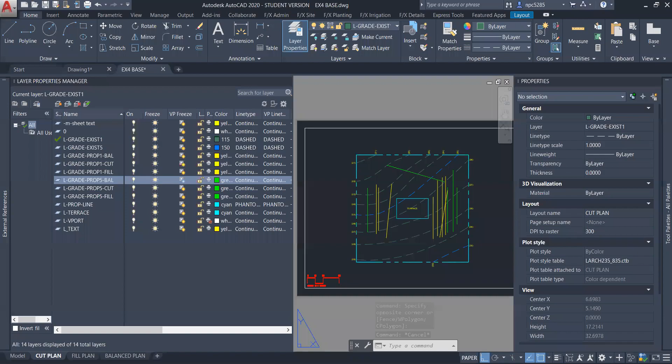Okay, so I am starting with EX4. I'm going to go through how you can organize your layers to make sure all of your line work is in one file, not separate drawings, and you should not be drawing in paper space or anything like that. The first thing I did to prepare for this assignment was go into the layer properties box. You can do that by typing 'layer' in the command bar, or by pushing the button up here.

I made a layer for each of the potential line work you're going to have. So when you do cut, you'll have your major and minor contours for that. When you have fill, you'll have major and minor for that as well, and balanced, so on. Total, you'd have 6 layers just for your contours for this assignment. I'll show you how to organize those, as well as how to turn them on and off for when you export.

So you've been provided the plan. I made these 6 layers that I just explained: L grade, and then proposed, and your minor and major - your firsts, your single, and your fifths - for balance, cut, and fill for all of those, and assigned their correct colors and everything that I thought was best.

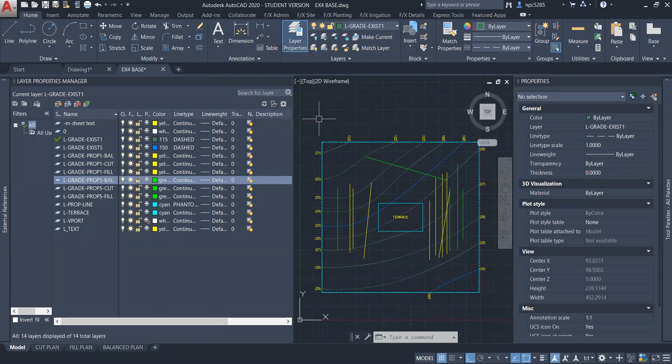After that, I drew a handful of lines on each of those layers. So this one's on proposed fill, this one's on proposed cut. There's a couple of them on each of them.

You can go about turning on and off layers, or freezing and thawing them, in a billion different ways. You can do it from your layer properties box - you go about doing it this way. You can freeze them, or you can turn them off. Either way, it stops displaying them.

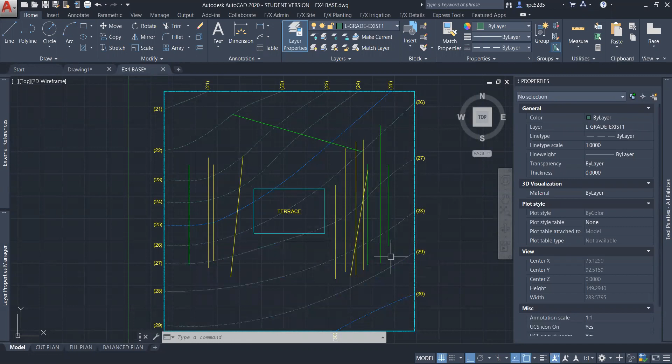Turning them off just changes their visibility, I believe, whereas freezing and thawing physically shuts them off, so that when you do a grab window, it can't grab anything, even if there's line work there. I believe with the light bulb turned off, you can still accidentally delete - if you do a Control A and select everything and push delete, it can still delete things whenever the light bulb's turned off. So I'm going to go about freezing.

You can also do it up here with these buttons. You push this button, click something, it freezes it.

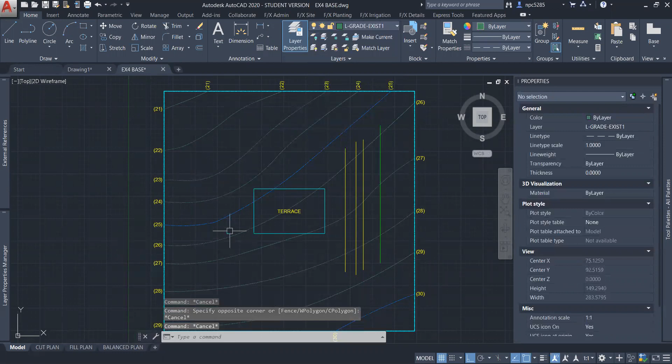So what I've got left is proposed cut and proposed cut fifth, right? So what you'll go and do is start with your cut - you'll draw your contours accordingly. I just did random lines to show, for example. Obviously your contours won't look like this. But here's some that are drawn on cut, and then you'll go about turning off the cut ones when you're done.

And you're going to move on to fill. So you're going to turn on your fill ones, thaw them. You can also do that with this button - it'll unthaw everything. This is more like strategic thawing.

Now you've got all your fill ones in here. After that, I'm going to freeze everything except balanced, so all my contours for balanced are in here. Afterwards, if I thaw all of the layers, you'll see they're still in here - you're just turning them on and off, right?

So after you've drawn everything and put them on their proposed contour layers that are identified with each of them, you turn them on and off as you need them so that they're in and out of the way as you're drawing the next series.

Once you've completed all your contour work, it's probably easiest to put your tick marks on the layer with that contour, just for ease, since that would add an extra 3 layers potentially to your layer properties. You're welcome to add 3 layers for the tick marks, but you can also just put them in with the contours for this one. So then we're going to move on to our paper spaces.

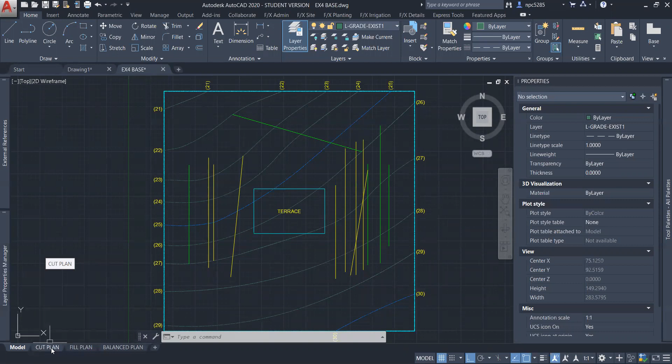These have been labeled accordingly and set up nicely for you. So if you notice, all of your current layers are showing and turned on. This is where you're going to go into your layer properties box, and verify that viewport freeze is a column inside of here. This should be within your paper space.

You should be able to see this. If you can't, right click in the gray bar anywhere in there and make sure that VP freeze is on. That'll give you this column.

A lot of people get this mixed up when they're freezing and thawing things, and sometimes accidentally turn things on and off, and they don't plot after that point. If they do that, same thing happens - no plot. Some people accidentally do that, so be very careful with what you're selecting. If something doesn't print, these are some good things to check in your layers properties.

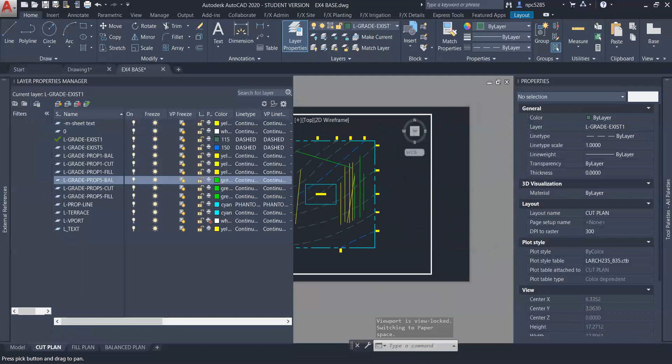This allows you to freeze and thaw things solely for when you're viewing them through a viewport. If you double click into your viewport, I'm going to go ahead and lock it down here in the bottom right, so that I can't pan around inside of it and it stays to scale, so that when I zoom in...

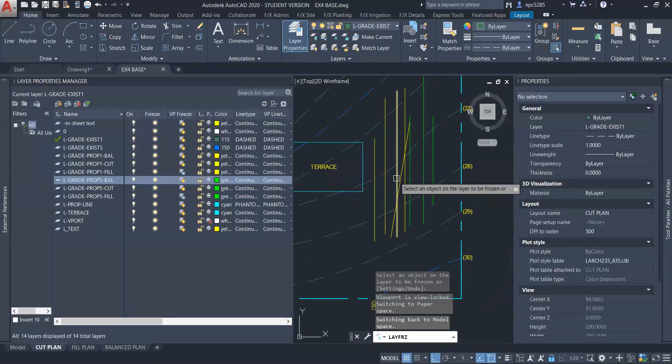This is cut, so I need to keep all of my cut layers, which I think I drew somewhere over here. So I'm going to do my freeze command inside the viewport and click on the layers, be sure it's those - that's cut, and this is also cut. So now I'm visibly only showing my cut layers in here, and if I select the viewport, it should show... or not.

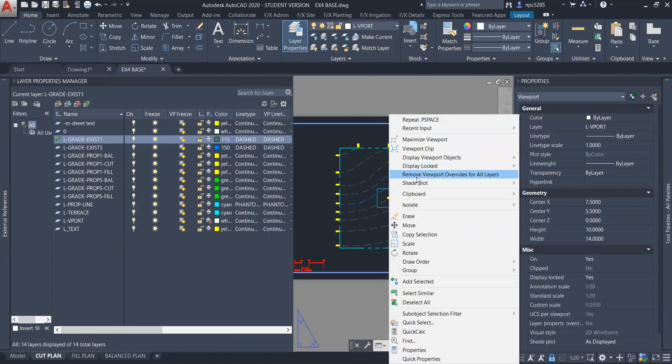Normally it will show in here when you select the viewport - oh, it's when you double click in, I'm sorry. So if you select the viewport, double click in, you can also select and right click, and do a maximize viewport where it takes up your whole screen and things like that. The easiest way is just to double click in.

Then you'll notice these show as frozen, but outside of it, they're not frozen - none of them are frozen. And if I go to my model space, they still all exist and they're showing.

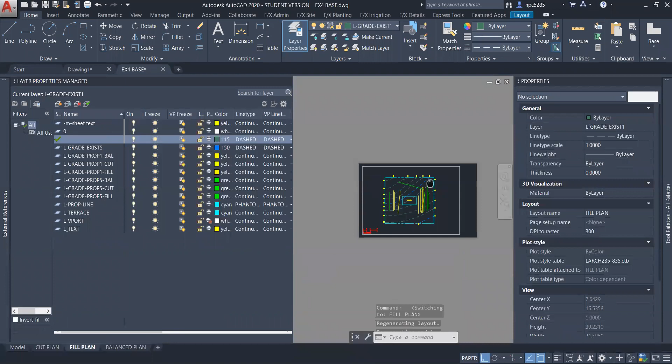Then I'm going to do that for fill as well. If I go to my fill plan, double click in, I'm going to lock it so I don't mess it up, and double click in, and I'm going to kill everything except fill - oops, I got the existing instead.

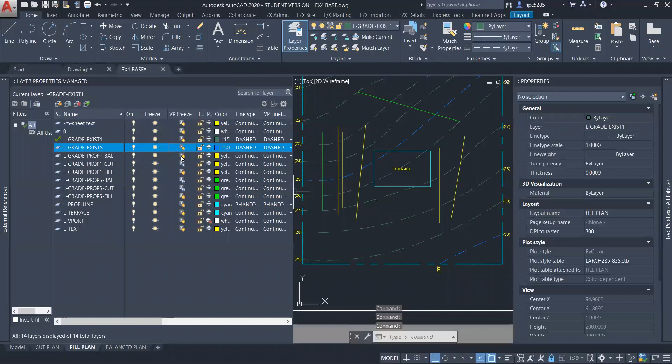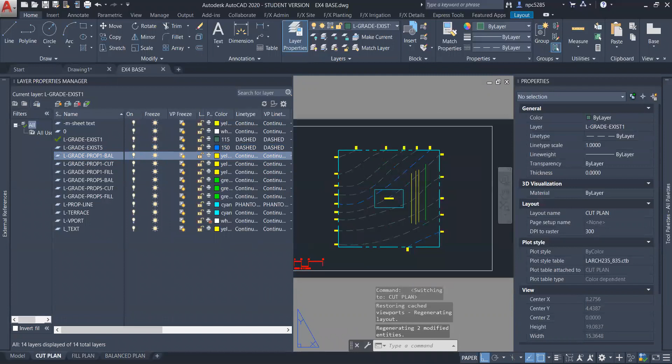So now I've turned off all of the layers that don't have fill contours. And if I select these, you'll see the ones that are left over are the ones I put on the fill layers, and that's all that's showing. Even though they're frozen in this viewport, if I go into cut, you can still see just the cut ones, and if I go to model space, you can still see all of them.

So for balance, same thing - double click in and you can click it here. You can also freeze them individually, and you'll watch them freeze over here, and you can unfreeze them the same way. So for this one, you'll need balance - you'll turn off everything but the balanced proposed contours.

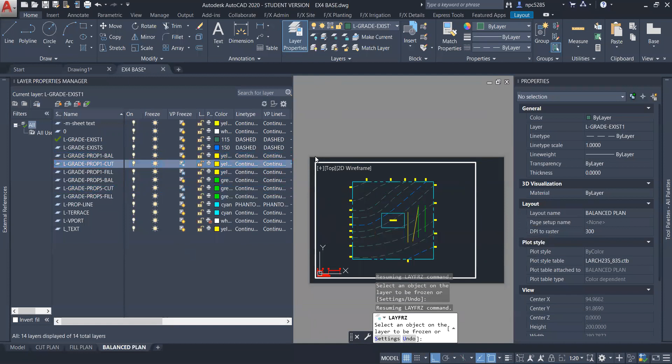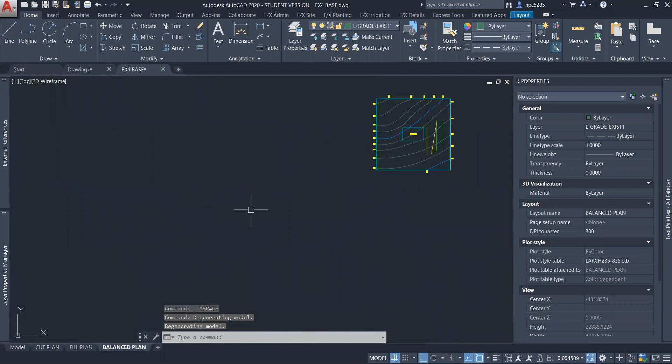This allows you to, and then to get out of viewports, if you don't already know, double click outside in the paper space. If you happen to be zoomed so far in that you cannot see paper space whenever you're clicked into your viewport, so now it looks like I'm stuck in model space, you can type in PS for paper space, and that will let you out.

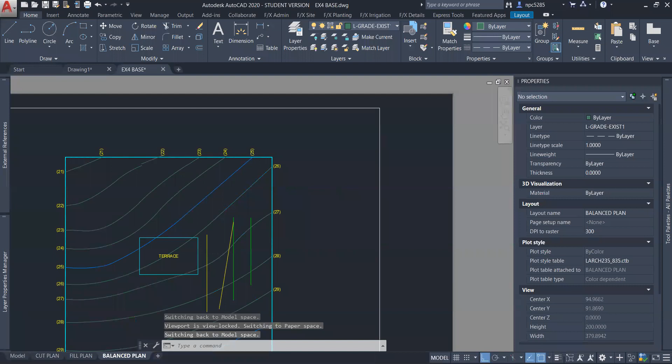Oh, it also wasn't locked, so it unscaled it - make sure you lock these whenever you get into them. So I'm going to do Control-Z a couple times. So: double clicking in, locking, and if you get trapped in for whatever reason, then PS gets you out.

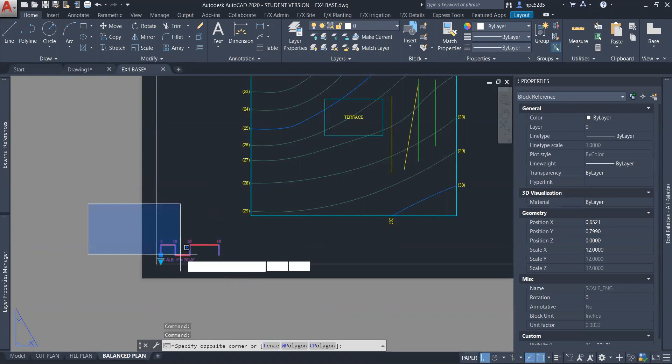Also, these are 11 by 17, so you can use your provided 11 by 17 template from your last assignment for the layout of your title blocks. There's currently a dynamic block for a scale in here - don't get used to that. After a while, you're going to need to put in your own scale and get used to doing that on your own, but this one is provided for you.

And this should have you pretty confident and ready to go in terms of how you can organize your layers and how you're going to plot these.